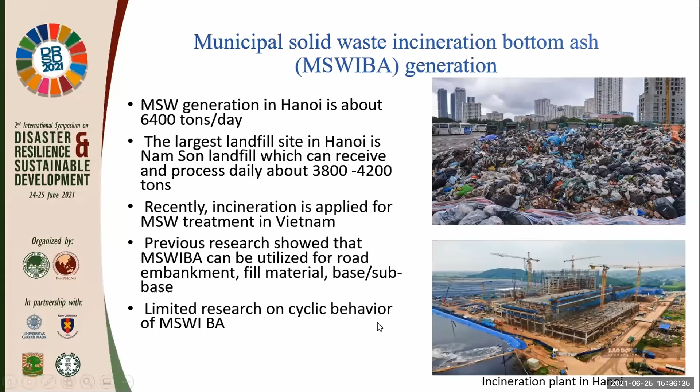Recently, incineration is applied for MSW treatment in Vietnam. Previous research shows that the MSWI bottom ash can be utilized for road embankment, base, and subbase. However, there is limited research on the cyclic behavior of MSWI bottom ash, so that's why we will focus on the cyclic behavior of the bottom ash in this research.

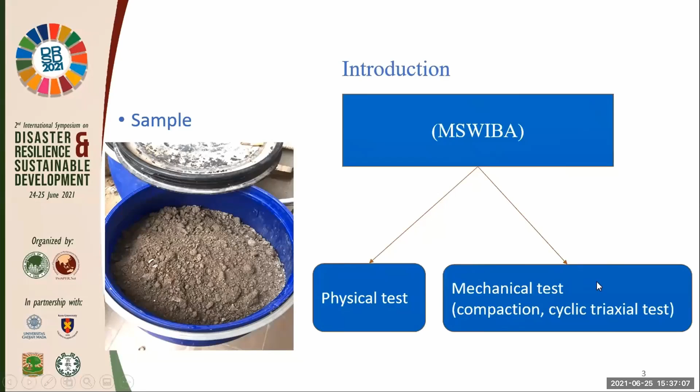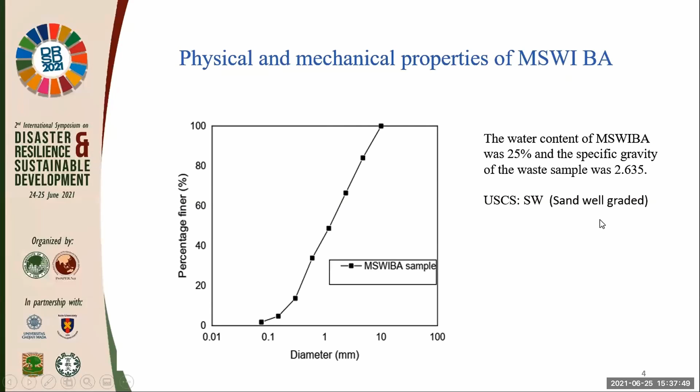This is the physical property of municipal solid waste incinerator bottom ash. You can see the particle distribution curve with percentage of finer versus diameter. We also have the water content of the bottom ash at about 25%, and specific gravity of the waste sample at about 2.64. According to USCS, we can classify it as well-graded sand.

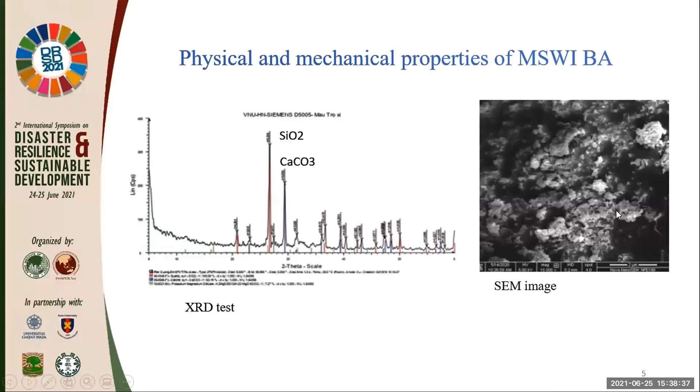Using XRD and SEM, we can estimate the micro properties of the municipal solid waste incinerator bottom ash. Here is the XRD test result: we have SiO2 and CaCO3 as the main components of the sample. The SEM image shows roughness on the surface of the sample, which means the sample has higher compression and higher potential strength, such as compression and the friction angle of the sample.

We conducted the resilient modulus test for the MSW bottom ash. First, we prepared the sample and compacted it into the triaxial mold with a diameter of 7 centimeters and a height of 14 centimeters. We compacted with the optimum water content and the basis for 90 and 95 percent of the maximum dry density.

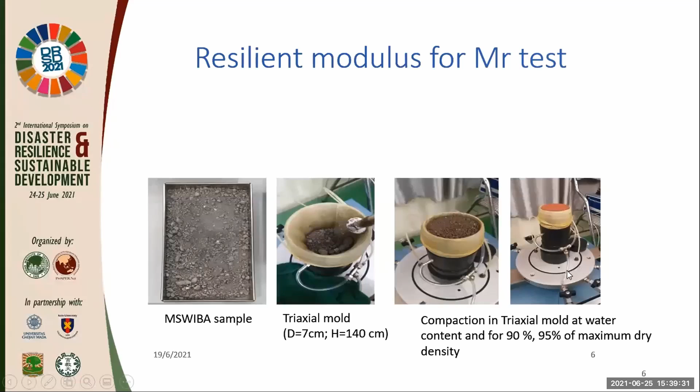According to the AASHTO T307-99 standard, the standard method of test for determining the MR of soil and aggregate materials, we conducted sequences from 1 to 15 with confining pressure sigma 3. We have the maximum deviator stress, and a given number of load cycles; for one cycle of 1 second, we have 0.1 second for increasing the load and 0.9 second for the recover duration. This controls the triaxial test sample setup.

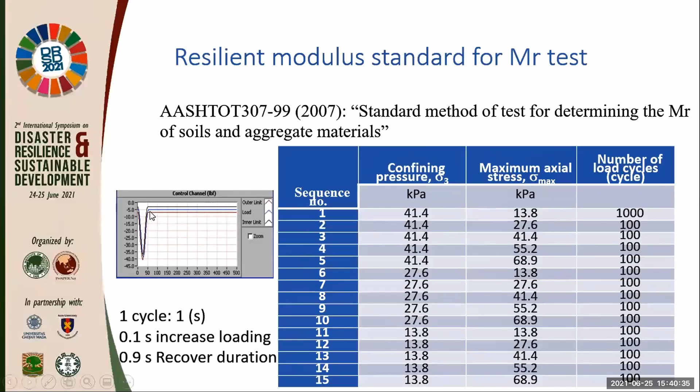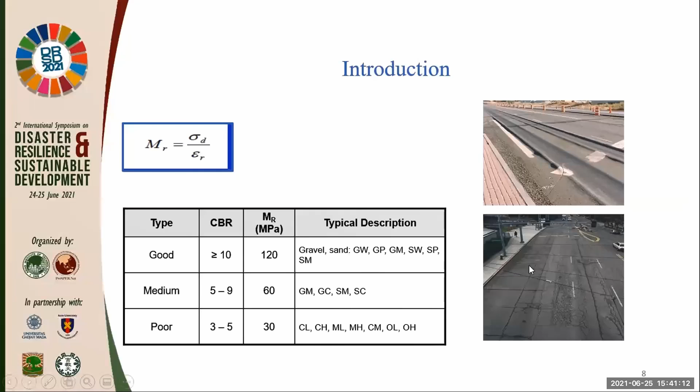Why do we need to conduct the resilient modulus test on the sample? Here we plan to use the bottom ash for road embankment, so we had to conduct the test to make sure the sample is good. For example, if we conduct the test and get the value of the MR, and if the MR is larger than 120, it means it's a good material for road construction.

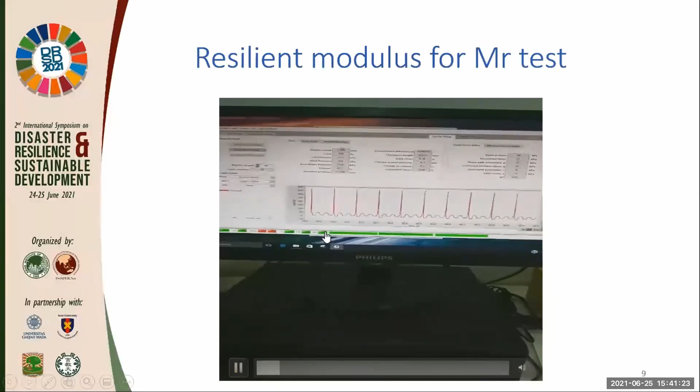Here I will show you how the machine works. It applies the cyclic loading as a triaxial test. We have the cell pressure and the deviator stress, and this shows the sample under testing.

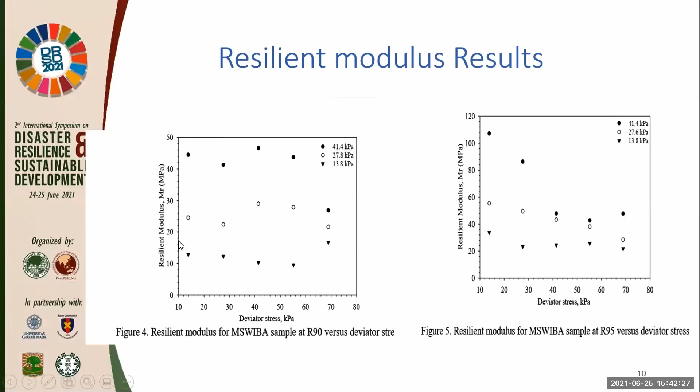For the results, we have the resilient modulus. Pictures 4 and 5 show the resilient modulus of the waste MSW bottom ash samples for 90 and 95 percent compaction. We have three different confining pressures: 41, 27, and 13 kPa. We can see the change of the resilient modulus according to the deviator stress, and also the change of the resilient modulus according to the axial strain.

We have two cases, 90 and 95 percent compaction degree. The picture shows the resilient modulus versus axial strain for samples at R90 and R95; especially at an axial strain of 0.1%, the resilient modulus of both samples is at its highest value for both R90 and R95.

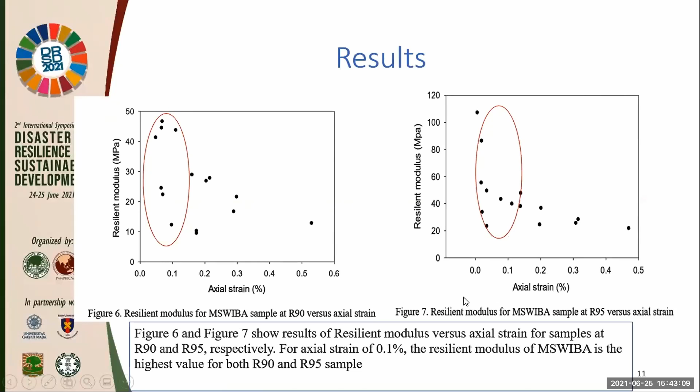Moving to the discussion: you can notice that the highest values occur for both samples at the beginning of the cyclic triaxial test. The behavior of the R90 sample is different from the R95 sample. For R95, the resilient modulus increases with increasing confining pressure and decreases with increasing deviator stress. The highest value of the MR is approximately 110 MPa for a cell pressure of 41 kPa, while the lowest value is about 20 MPa for a cell pressure of 13 kPa.

A similar behavior was found for coarse-grain size material used as sub-base material, as reported by Rahim in 2005.

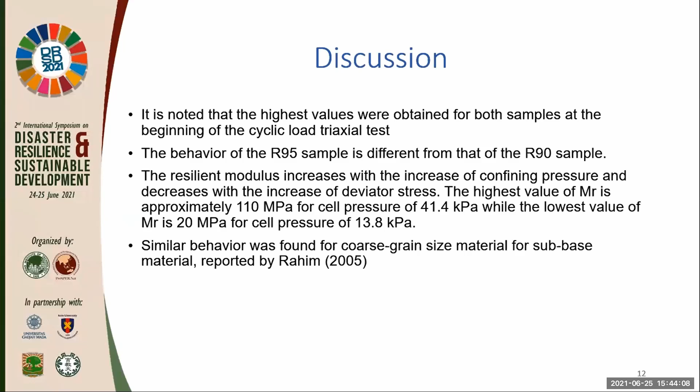For the conclusion, based on the experimental results, the following conclusions can be drawn. First, in the case of the R90 samples, the MR value decreased to some extent, then fluctuated and finally reduced when the deviator stress increased up to 70 kPa. In the case of the R95 sample, the resilient modulus increased with increasing confining pressure and decreased with increasing deviator stress.

It is recommended that MSWI bottom ash can be used as a construction material, such as for road bed and foundation layer.

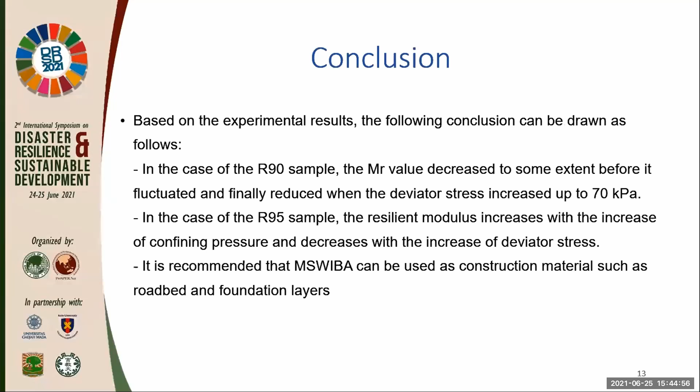And finally, thank you very much for your kind attention.

That's great, thank you very much. It's a great presentation. I think what you have highlighted is quite important, that you can actually use waste materials for practical use. I do have a question, but we can come back to that later. What cost benefit analysis have you conducted? I can believe it is cost effective, but what kind of benefits does it have over more traditional, more prevalent building materials for road construction? But let's leave it with that, that's a great presentation. Let's move on to the next one. Thank you.

Indrajit, do you want to add anything, or are you okay for us to go on? Let's go on. Okay, great. Thank you.

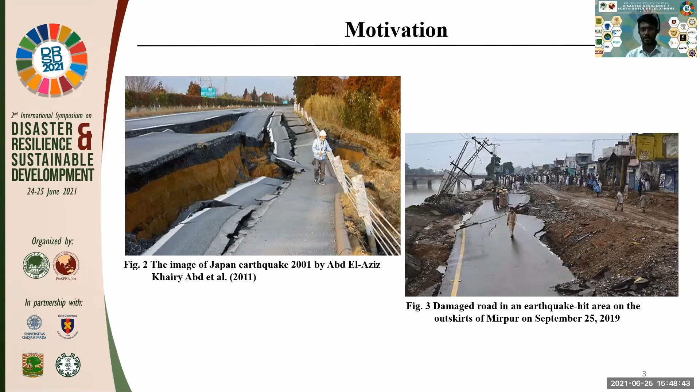So we have taken up this study to get some idea about the seismic behavior of pavements, how it will behave. Our research background includes: in the year 2011, Anbazhagan et al. made an attempt to propose a new RDS scale to classify and quantify road damage caused due to earthquake, based on data collected from major earthquakes in the past worldwide, except India.

As we know, the MMI scale is extensively used to measure earthquake intensity, which is based on damage caused to buildings, accounting site and induced site effects. But this MMI scale is not suitable to measure and quantify the damages caused to pavements due to earthquake. Hence, this RDS scale model is very significant in this aspect.

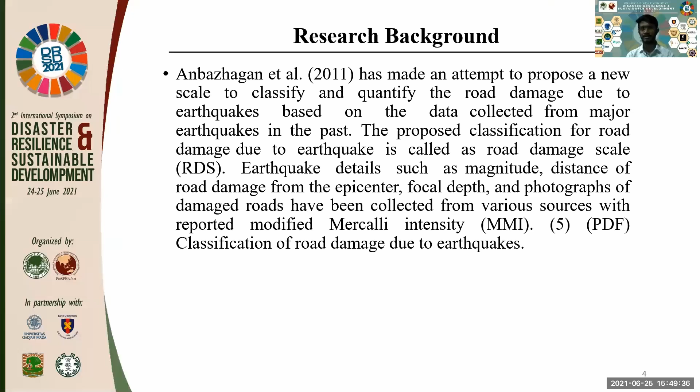In our study, we carried out FEM modeling, and the material property and geometry of the pavement and embankment were taken from Huang et al. 2004 and Tang 2001. A mesh convergence study was carried out to get the most stable results. The height of the embankment is 10 meters and the width is 6 times the height. The sides of the embankment are vertically fixed and the base is fully fixed, whereas 3 layers have been considered in the case of the pavement.

Three different layers have been considered with the application of load Q. In the base of the pavement, in the middle, we applied the harmonic sine loading to take into account seismicity.

Initially we considered only a 10 meter embankment to study how it behaves under the seismic harmonic load. But we found that using two different software, we are getting almost the same result, so the validation of the model is very good in this aspect.

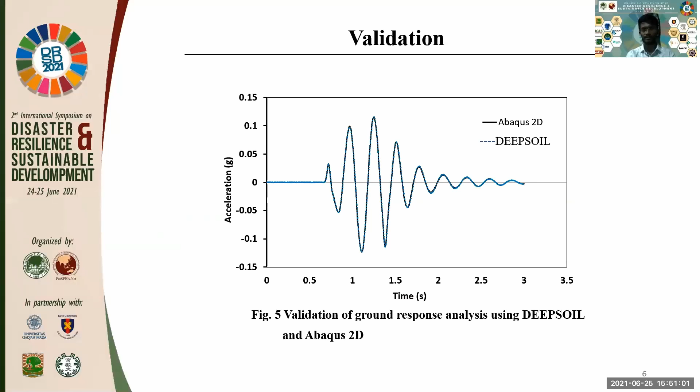In the next section, we also took into account the effect of the pavement layer, and 3 points have been considered for the study: point C, which is the crest, point D, which is a second point, and point I, which is the far field effect of the embankment under study.

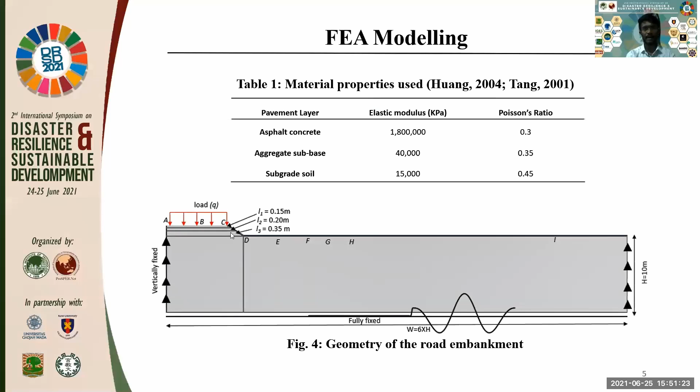As we go far from that crest to the far field point, the effect of acceleration in the acceleration time history shows a decrement, whereas the effect of loading is negligible here. For q equals 0 kPa and q equals 100 kPa, there is no effect on acceleration time history, and it gives almost the same result.

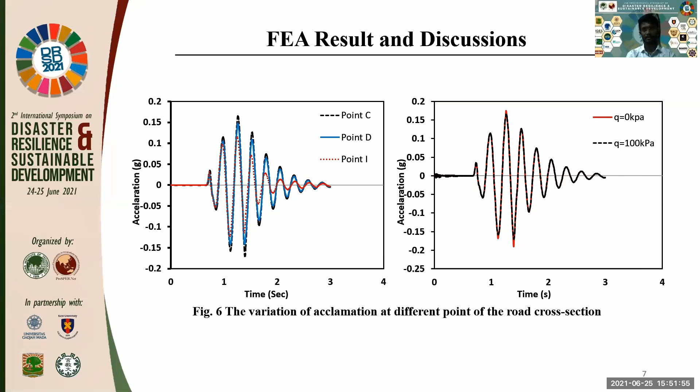In the next section, we considered loading and the pavements, with three different layers of the pavement. We observed that with respect to depth of the embankment, after 7 meters there is significant variation in the acceleration of the layers. We also observed that with increasing static load, from 0 to 300 kPa, there is an increase in acceleration, which is maximum for q equals 300 kPa and minimum for 0 kPa.

So from our study, these conclusions can be drawn: the comparison of acceleration versus time history using DEEPSOIL 1D and Abaqus 2D shows a reasonable result. The maximum seismic acceleration is found at the crest of the road embankment, and as the distance increases, the PGA of the ground motion decreases. The amplification increases due to the presence of pavements.

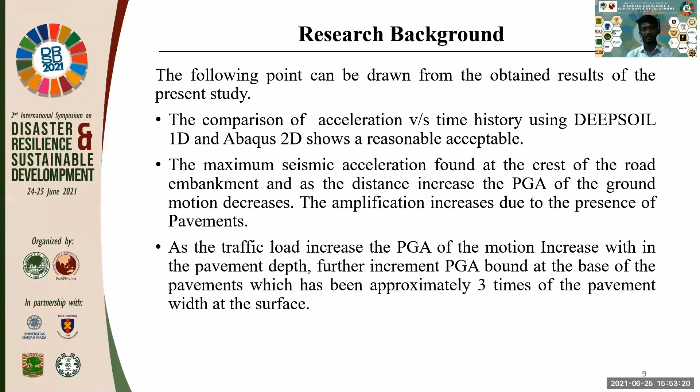As the traffic load increases, the PGA of the motion increases within the pavement depth. Further increment of PGA is bound at the base of the pavement, which has been approximately 3 times the pavement width at the surface.

These are the references that we have considered. Thank you.

Thank you, that is great. Look, we need to move on very fast because some of your presentations are longer than 8 minutes, and we have roughly a bit more than 20 minutes. So I think let's just carry on. Is that all right? Thank you.

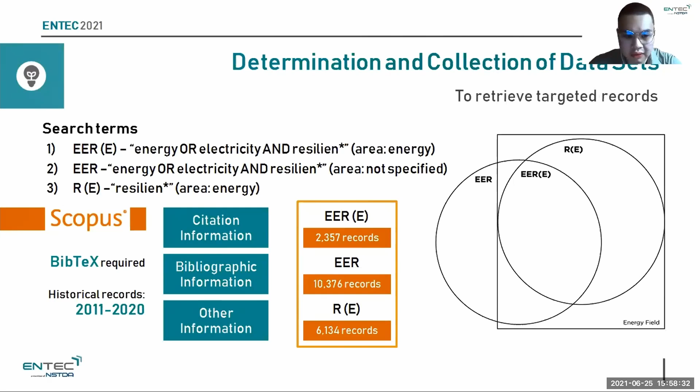The method that we use to analyze the data sets totals four analysis methods to capture the landscape. The first one is the word cloud.

It visualizes the occurrence frequencies of keywords using size. The second one is word growth.

It visualizes the changes over time of the occurrence frequency of the keyword. The third one is the MCA.

It visualizes associations among the keywords and groups them into clusters. The last one is the thematic map, which categorizes keywords into clusters and reflects them into themes based on density and centrality of the clusters.

For the word growth, there are several keywords showing sharp increases, for example microgrid, which has the same pace as resilience, climate change, and sustainability.

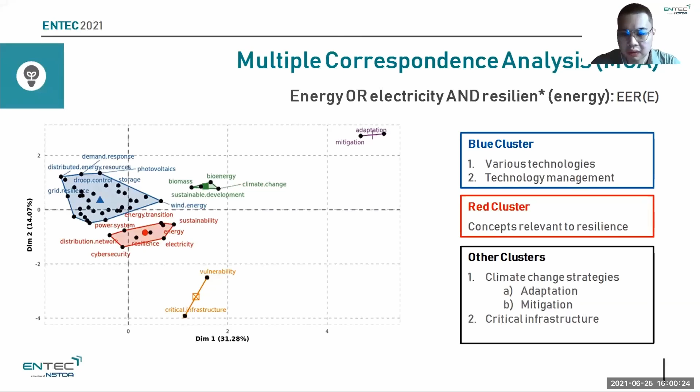For the thematic map, there are several themes existing here. The motor themes are the themes that scholars have been driving with these keywords inside, for example sustainability, microgrids, distributed energy resources, or energy storage.

The niche theme is the theme that scholars have developed but hasn't received a degree of importance, for example climate change and renewable energy.

From the results above, we also did other search terms and combined it in the landscape on your left hand side. We found that several keywords are identified. So for the landscape of energy resilient research, key topics within the landscape should be climate change, sustainability, distributed energy resources or microgrid, and smart grid.

This landscape can facilitate communication among stakeholders in various domains and ensure promotion of climate change and sustainability on energy resilience. And this is the end of my presentation.

COVID-19 transmission, or the means of passing on the disease from person to person, is caused by respiratory droplets in close contacts. Therefore, as a major preventive measure, physical distancing related restrictions and guidelines were imposed in all parts of the world in different scales.

Research studies have proven that the higher level of travel restrictions imposed in wider geographic extents can control the transmission of the virus in significant levels.

This ability of the disease to spread is measured using the R reproduction rate. Research has identified that the cities where the highest number of R rates were recorded are common to have high-density community agglomerations with high mobility patterns.

Usually, high mobility patterns are found at cities where road network connectivity is recorded in high values. Therefore, network connectivity can be considered as one of the factors influencing the transmission of COVID-19 or any other contagious disease.

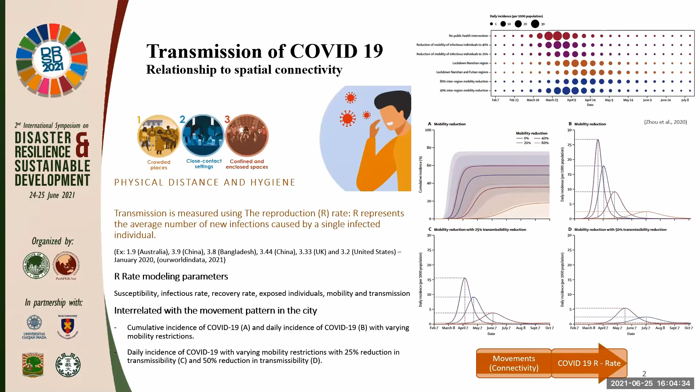As the world was battling against COVID-19, what we can identify is that all disaster events are followed by a sudden spike in COVID-19 cases during the post-disaster period. Therefore, as far as pandemic outbreaks are considered, rapid onset disasters can be considered a high conflicting and high-risk associated scenario, as there are no proper guidelines available.

As a novel response to the integrated hazard situation with COVID-19, the first ever official response released was the guidelines for tsunami warning services, evacuation and sheltering.

It clearly explains that a tsunami evacuation order should take priority over a COVID-19 stay-at-home order. During this period, fortunately, we have not experienced a tsunami amongst the pandemic. However, other disasters during the pandemic explain the probable situation. It is questionable as it generates complementary environments for the pandemic, meaning rapid and mass movements and confined community gatherings during evacuation which compromise physical distancing measures.

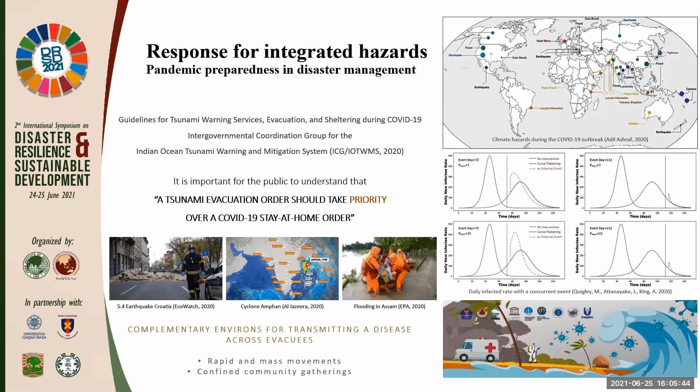Where does it happen and how? Most of the aforementioned disaster situations are followed by general evacuation proceedings, aimed at guiding all affected persons towards safe places irrespective of the pandemic condition. In tsunami evacuation, it mainly considers the deterministic tsunami wave height and the estimated lead time for the first devastating wave.

Therefore, a different strategy to incorporate a pandemic situation in this evacuation planning should be introduced. However, static evacuation routes with predefined options have deprived adaptive pandemic preparedness in the evacuation process. Therefore, the evacuation planning process should be improved using a connectivity-based approach, because connectivity can identify the risk of internal and external impacts from other hazards such as pandemic and identify the critical routes in the evacuation plan.

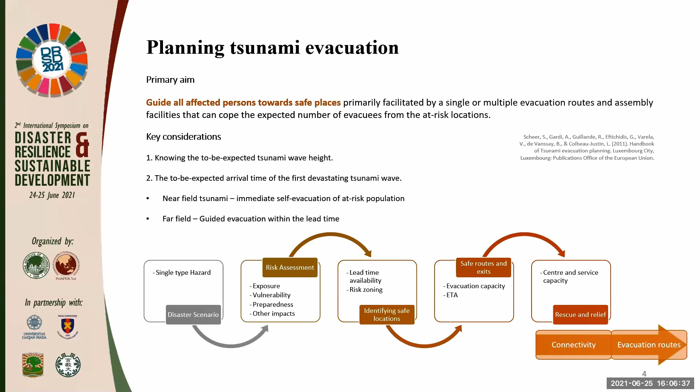What we can observe in the literature is that the guidelines on disaster response, particularly on evacuation, conflict with the guidelines on pandemic management. In particular, pandemic management measures consist of global strategic objectives including controlling community transmission through physical distancing measures. In contrast, the current evacuation guidelines are set to promote concentrated and confined evacuation, mainly considering the convenience for rapid response.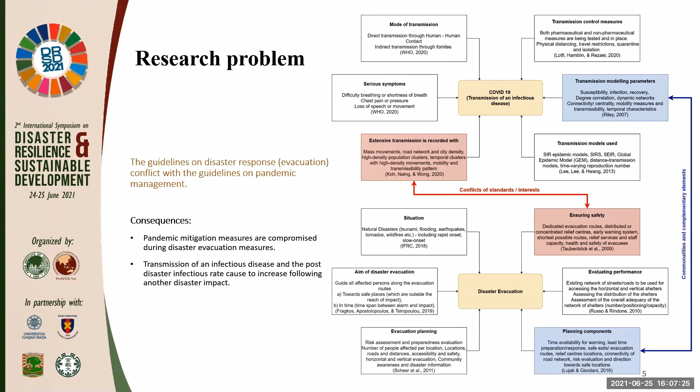This can increase the risk of disease transmission, and the efforts to contain COVID-19 or an infectious disease can be compromised. Therefore, identifying the relationship of COVID-19 or infectious disease transmission during evacuation is a significant need in the current identified guidelines.

Therefore, to address this research gap, the COVID-19 transmission pattern can be studied over a simulated evacuation model for a rapid onset disaster situation and identify the potential relationships.

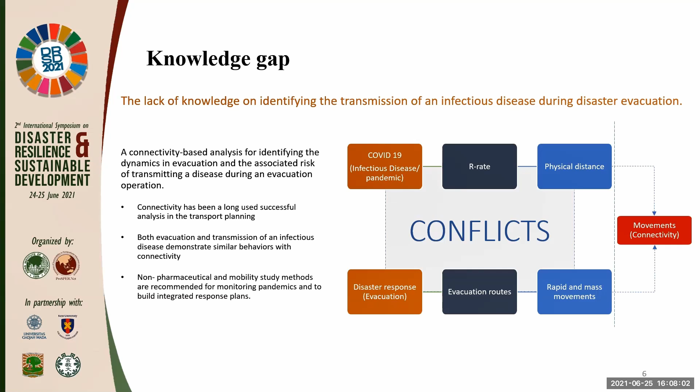For this, a connectivity-based approach can be considered as a potential way forward, because connectivity has been a long-used successful analysis in transportation planning. Both evacuation and transmission of an infectious disease demonstrate similar behaviors with connectivity, and non-pharmaceutical and mobility studies are recommended for monitoring pandemic and to build integrated response plans.

Accordingly, the research aims to identify the elements affecting the transmission of an infectious disease during evacuation for developing the framework for planning safe tsunami evacuation clusters. The framework focuses on improving the preparedness of coastal cities with a comprehensive tsunami evacuation mechanism for pandemic situations.

An integrative literature review approach was used for developing a new framework and perspectives on the topic. The key findings of the literature review were studied in a content analysis using the open source based Gephi software to identify the key components for the conceptual framework.

The results were incorporated into the conceptual framework to facilitate the pandemic risk assessment during an evacuation operation following three phases: focusing risk identification, risk assessment, and risk management.

Research has shown that the weighted connectivity analysis can identify the strongly and weakly connected parts of the network and can be used in the road network risk assessment. Node centrality, as an analytical method of connectivity, can represent the risk of a given node based on the geometric positioning of the network. The node properties can be weighted in combination with the tsunami risk parameters such as exposure, vulnerability, and disaster preparedness.

By integrating the simulation of evacuation with COVID-19 R data, the hotspots of pandemic outbreak during evacuation can be predicted. Accordingly, the nodes can be ranked based on the value of risk to develop a clustered evacuation strategy for the areas identified with high pandemic risk during an evacuation process.

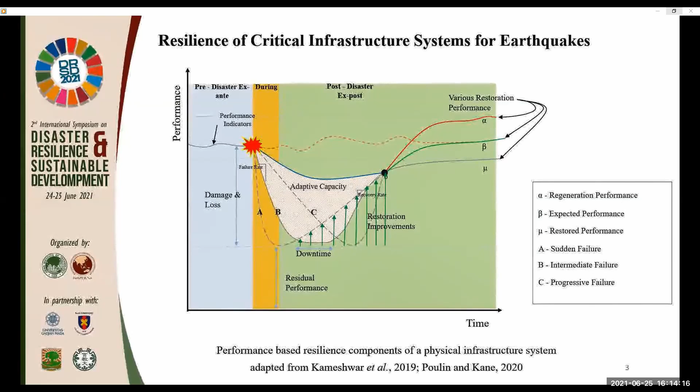So the methodology was carried out using the Scopus database as well as the PRISMA flowchart. As a first step, Scopus database was used to retrieve appropriate journals and articles with the limitation of engineering and English language based articles.

Consequently, 228 journals were selected by reviewing the abstract as well as the title of each study and the scope of this study. Subsequently, 43 multi-hazard based frameworks were chosen as a final step, and 24 earthquake based frameworks were used in order to progress the further study.

Critical infrastructure resilience framework in this study especially focuses on 2015 to 2021 recently published articles. It's obvious that 2020 has more numbers of articles studying the novelty and new type of proposed frameworks. Also, critical infrastructure such as transportation, water, electricity, power, and telecommunication was included in the study.

At the same time, houses and buildings were studied in order to check the structural integrity of critical infrastructure, such as hospitals and schools that come under critical infrastructure service providers.

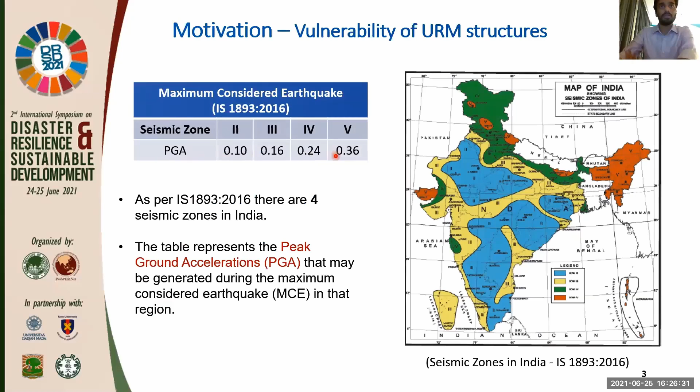Moving towards the motivation, as you are all aware, there are 4 seismic zones in India, which are determined based on the PGA values of the maximum considered earthquake that can occur. High seismic hazard, when coupled with high exposure of unreinforced masonry structures, gives rise to a high level of vulnerability.

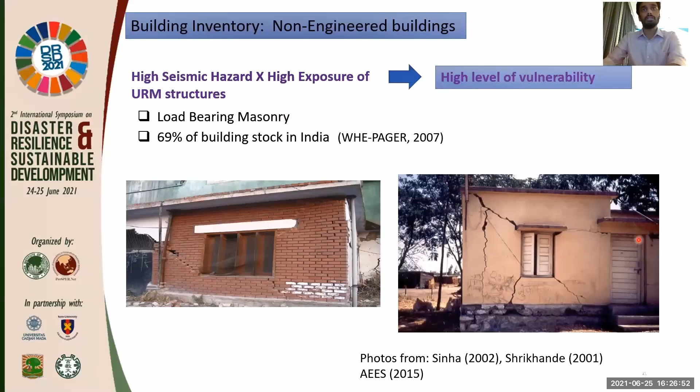Most of the building stock, that is around 70% in India, is load-bearing masonry, and these types of structures are highly vulnerable to damage. The images show some of the damages that have occurred to masonry structures because of earthquakes.

So the objective of the study is to assess the vulnerability of non-engineered unreinforced masonry piers made with soft brick, using the 2001 Gujarat earthquake for scenario-specific assessment.

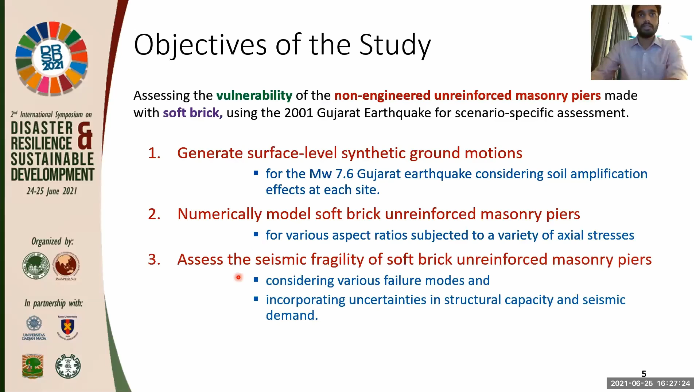For this, we first generate surface level synthetic ground motions for the magnitude 7.6 Gujarat earthquake, and then we numerically model the soft brick unreinforced masonry piers for different aspect ratios and axial stress values. Then we assess the seismic fragility of these unreinforced masonry piers.

Looking towards synthetic ground motion generation, we require synthetic ground motions because we usually lack recorded data, especially in near field regions. For example, for the magnitude 7.6 Gujarat earthquake, there are only 13 PGA values available. Hence, we use synthetic ground motions.

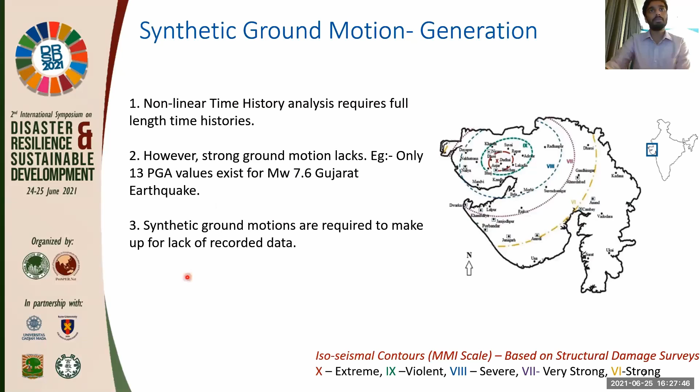In this study, we use the modified stochastic finite fault method to generate synthetic records. This method has 3 key steps: first, the earthquake fault plane is divided into smaller subfaults; each subfault is treated as a single source radiating seismic energy; and finally the entire time history is computed as the summation of the response of these individual subfaults.

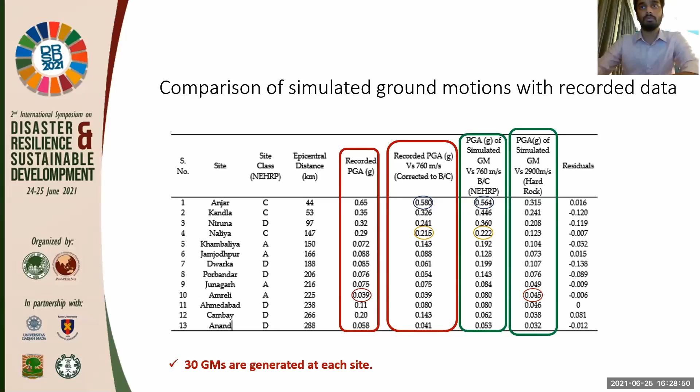Now, moving towards numerical modeling of soft brick unreinforced masonry piers. Soft brick unreinforced masonry.

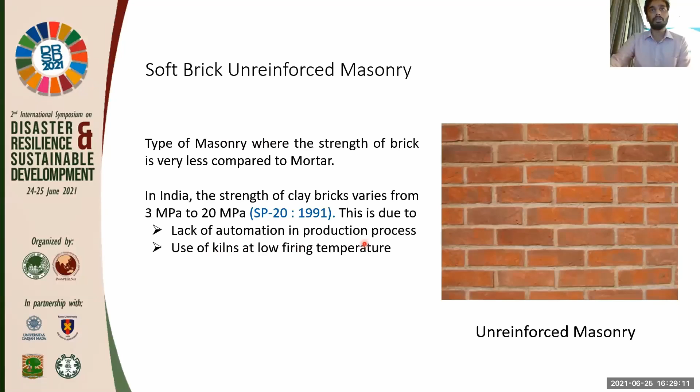This is a type of masonry where the strength or stiffness characteristics of brick is very less compared to that of mortar. For example, in India, the strength of clay bricks varies from 3 to 20 MPa. This is due to lack of automation in the production process and use of kilns at lower firing temperature.

So for modeling the masonry, we use the micro modeling approach in which the brick elements are modeled as continuous elements, and the interaction between brick and mortar elements are represented by interface elements, and these elements facilitate the stress transfer between the brick units.

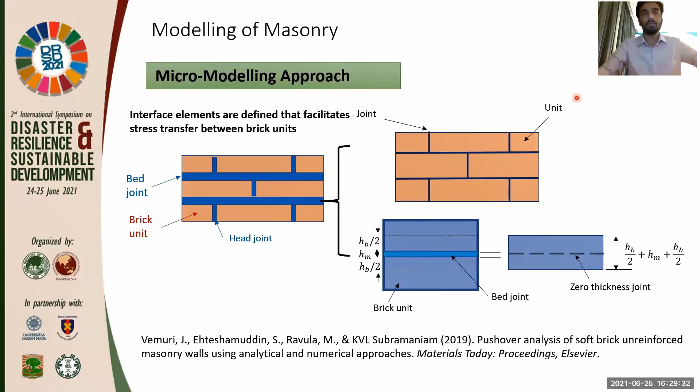Now we perform a parametric study to observe and quantify the effect of axial stresses and aspect ratio on the failure modes of unreinforced masonry piers. We vary the axial stress using 3 values, 0.1, 0.5, and 0.75, and aspect ratios four different values. We observe 3 different failure modes: sliding, flexure, and shear.

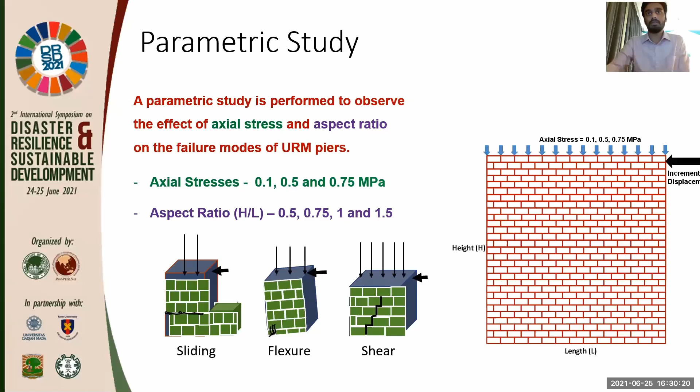To identify the limit states in each of these failures, we plot the monotonic pushover curves for these failure modes. In sliding failure, we see that first there is some onset of flexure cracking, followed by sliding, and then at 4 mm there is loss of bond resulting in collapse.

For shear wall, we again see some onset of flexural cracking very early, then onset of diagonal cracking, followed by failure, for which the diagonal cracking extends over a larger part of the wall. Then for flexure wall, we notice the failure in form of toe crushing or rocking of the wall.

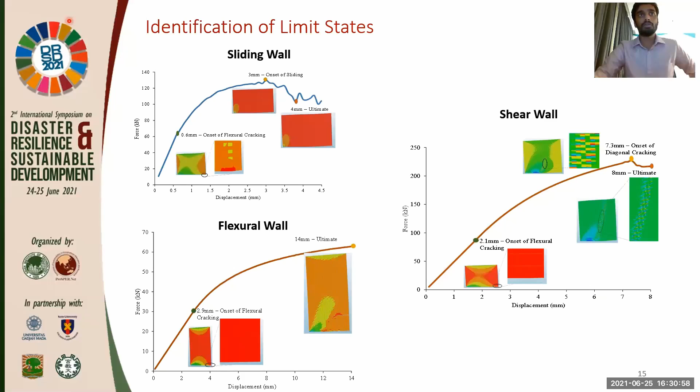Here is a failure matrix that we were able to build using different values of axial stress and aspect ratios. So first sliding failure, followed by shear, and then flexure dominating for higher aspect ratios.

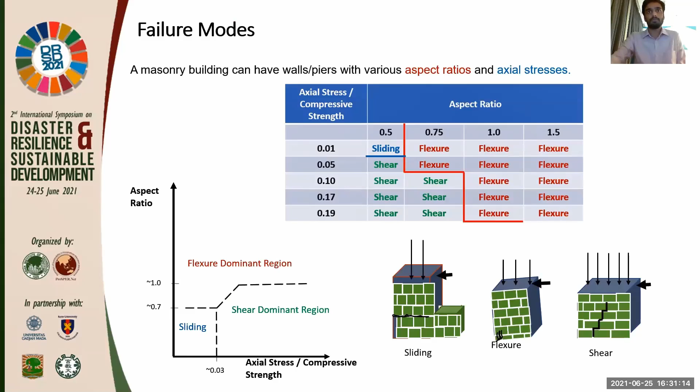Then looking at the seismic fragility assessment. Here is a framework developed by us for carrying out the fragility analysis. First, we simulate the response of 10 soft brick unreinforced masonry pier samples, and we also generate 10 earthquake ground motions for each PGA level, which gives us 100 nonlinear time history analyses, and using this we can develop the collapse fragility and calculate the performance of the structure.

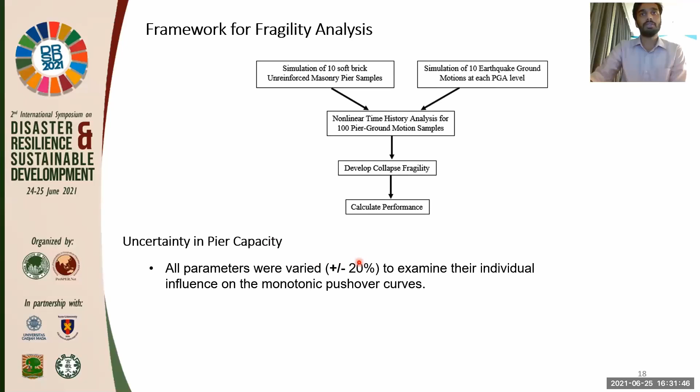And we quantify the uncertainty in pier capacity by varying all the input parameters by 20% to examine their individual influence on the monotonic pushover curves. We observed that there are three parameters which affected the response of shear walls the most, five parameters for sliding, and only one parameter for flexure pier.

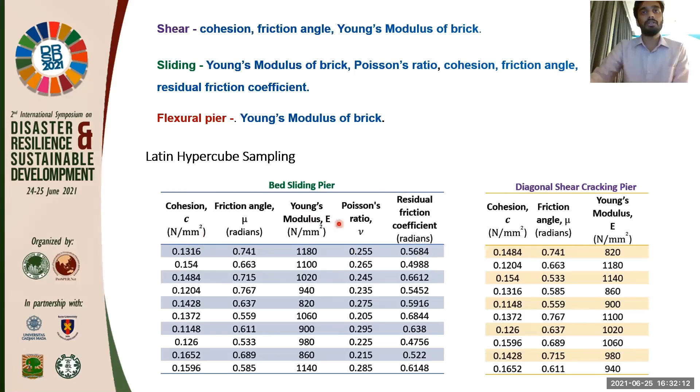Now we use the Latin hypercube sampling, which generates random realizations of these input parameters. For example, for bed sliding pier, we have 10 realizations of 5 different input measures. Similarly, we have it for diagonal shear cracking as well. Values from the Latin hypercube sample give us different monotonic curves for different failure modes.

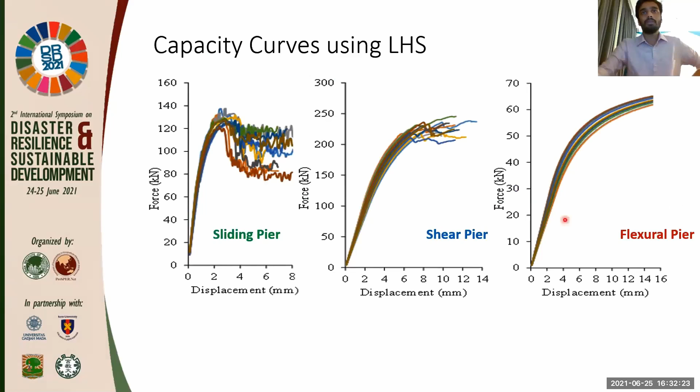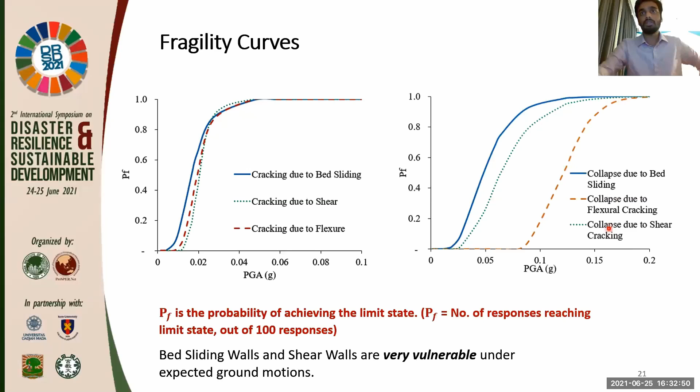Now we were also able to quantify the ground motion and capacity uncertainty. We observed that the ground motion uncertainty, represented in terms of the coefficient of variation of the pier displacement, is far more significant than the capacity uncertainty found in flexural walls as well as shear walls.

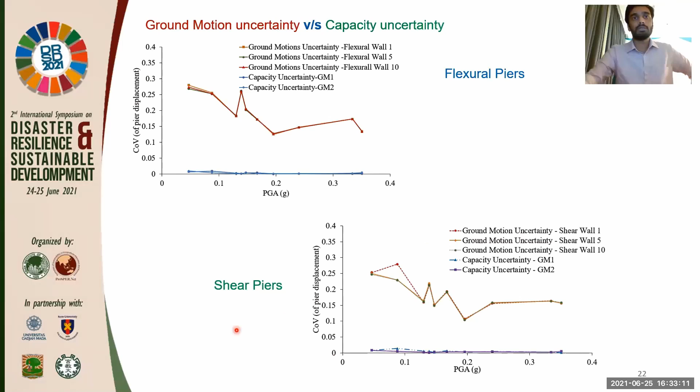As a summary, ground motions are generated at surface level for various towns of Gujarat. Then we employ micromodeling technique to model the response of soft brick walls, and we observed that aspect ratio and axial stress significantly affect the type of failure, and we developed a failure matrix as well. Then we developed a framework for seismic fragility analysis, and used the Latin hypercube sampling technique to account for uncertainty in pier capacity.

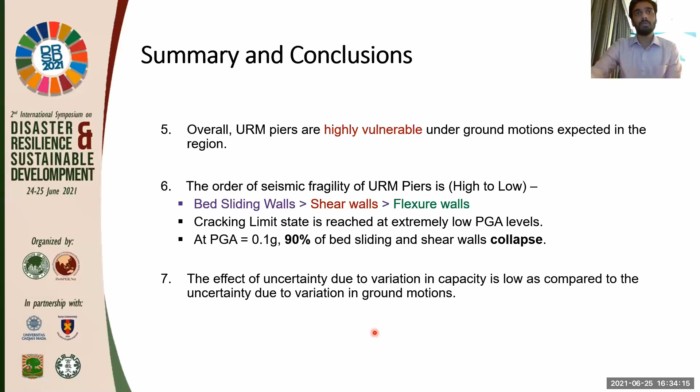We observed that unreinforced masonry piers are highly vulnerable under ground motions expected in the region, and the order of fragility of these piers is that sliding walls fail first, followed by shear, then flexure walls, and the cracking limit state is reached for very low PGA values. At PGA of 0.1g, 90% of bed sliding and shear walls collapse. The effect of uncertainty due to variation in capacity is very low compared to the uncertainty due to variation in ground motions, which was calculated from the coefficient of variation of the pier displacement.

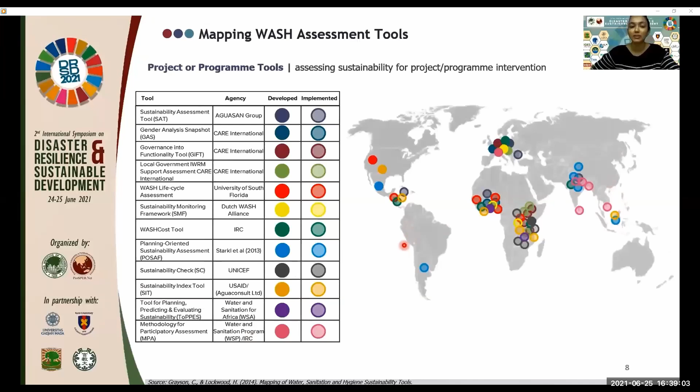As seen, the development of these tools majorly takes place in Europe or North America, but they are majorly being applied in African, Asian, or Latin American countries. So most of the tools are developed in the global north and applied in the global south. However, an ideal scenario would be a tool being developed taking into consideration the contextual scenario of where it is to be applied, and the study is exactly trying to do that. Since the IRC building block framework hasn't been applied anywhere yet, and the study is in collaboration with IRC, it is taken as a reference point to further carry out the study.

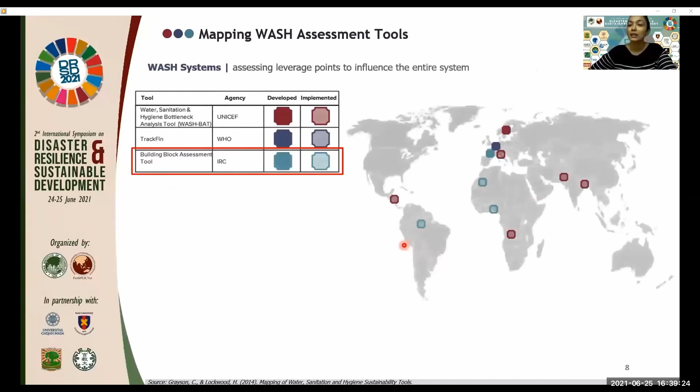Now coming to objective 3, which forms the main crux of the study, we are trying to answer three questions. The first is, what is the approach for institutional assessment? The approach is essentially deciding upon a set of performance indicators which will allow us to map the strengths and weaknesses and then identify areas of intervention.

This is being done for a city area of 566 square kilometers, with water supply household coverage of 98%, sanitation coverage of 86%, and city coverage for drainage of 30%.

Now coming to the second question, which is, what is the framework being used to perform the institutional assessment? The macro level assessment part of the framework includes using the IRC framework to analyze and operationalize it for our purpose, which basically included mapping all the institutional agencies in WASH contributing for the city of Ahmedabad.

Step 2 includes, for macro level assessment, deciding performance indicators and categories by referring to literature on institutional assessment and looking at what are the good practices in institutional functioning.

Step 3 is formulating a questionnaire and deciding upon a set of stakeholders in order to tap into the decided set of indicators.

Step 4 is rating and assessing the institutional performance by deciding upon the rating method for each of the indicators and then also corroborating it from secondary sources. The result is then in the form of a performance matrix, which will allow us to identify areas of intervention.

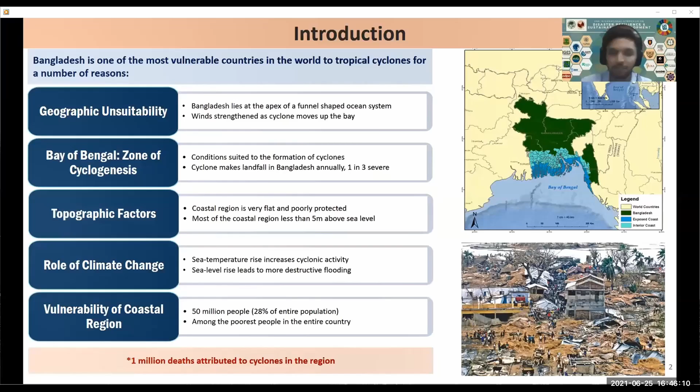Here we see the destruction caused by the 1991 Gorky cyclone, which left 300,000 people dead. In total, over 1 million deaths have been caused by cyclones in the region. Now, to save lives, the government and various NGOs have taken the initiative to build cyclone shelters, which are multi-storied reinforced concrete buildings and structures, such as those seen in the images below.

Looking at the graph, we can see that in the aftermath of the 1991 cyclone, there has been a remarkable effort to construct cyclone shelters, and at present there are over 6,000 shelters in the country. On the right is the historical overview of cyclones in Bangladesh. The top graph shows cyclone-related deaths on a logarithmic scale, and we can clearly see the number of cyclone deaths in recent years is significantly lower than in previous years.

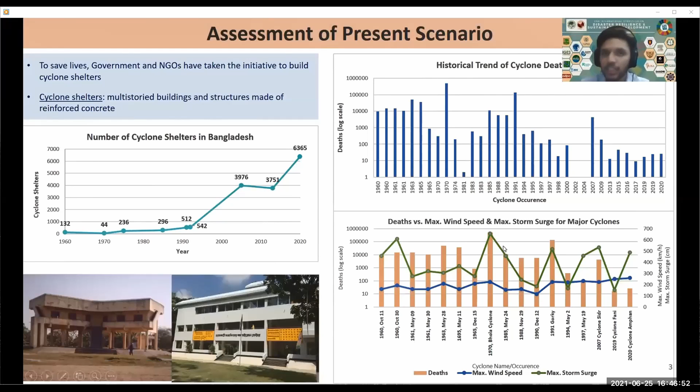This is despite the fact that recent cyclones have had wind speeds and storm surges as great, if not greater, than those in the past, which were much more deadly. So clearly, the cyclone shelters are having a positive impact. Yet despite this commendable progress, cyclone shelters still accommodate only 5% of the coastal population, so new cyclone shelters need to be built.

However, previously there has been no scientific basis for selecting where cyclone shelters should be located; it was done mostly on the judgment of experts or the demands of locals, and no study has really tried to address this issue. So to maximize effectiveness and resource utilization, there needs to be a scientific study to reevaluate the placement of cyclone shelters, and this study aims to achieve exactly that.

This study has three main objectives: firstly, to conduct a cyclone risk assessment of the coastal region through a risk matrix; using this, we can identify which locations most urgently require capacity; and lastly, we can propose a plan for the placement of future cyclone shelters along the region.

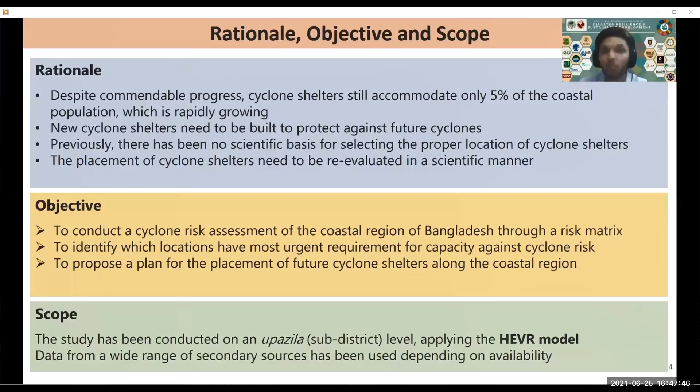This study has been conducted at the Upazila level, roughly equivalent to the sub-district level, where we apply what is known as the HEVR model, using data from a wide range of secondary sources. The methodology we applied is a modified approach based on the HEVR model first put forward by the UN IPCC in their SREX report in 2012.

So what we need to do is mitigate this remaining risk. We need to further build capacity that will allow the community to fully withstand the disaster, so that capacity and risk can fully offset one another. This is the basic principle that serves as the basis of our entire study.

So what we did was, for each element of risk, H, E, and V, as well as for C, there are a number of components that serve as parameters. We have assigned weightages to each of these components, we have normalized the attribute data, and we have categorized them from 1 to 5 so that we can develop a risk matrix.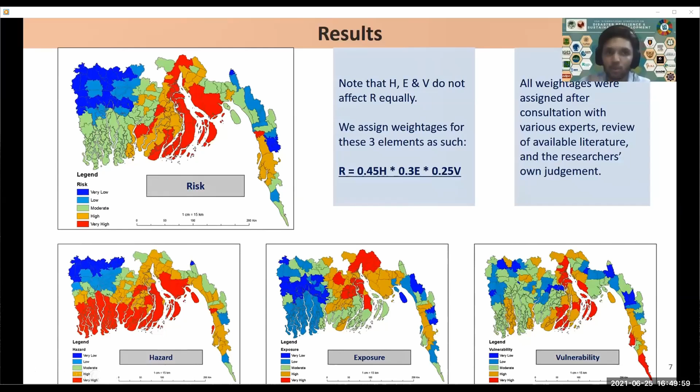Here is the risk map, which was derived from the hazard, exposure, and vulnerability maps, each of which were derived from their respective components. For each, you will see there are a number of qualitative descriptors, and each of these corresponds to a numerical value from 1 to 5. So very low equals 1, low equals 2, moderate 3, high 4, and very high 5.

Likewise, we have derived a capacity map, and we have done an analysis for each Upazila based on risk and capacity. Here we introduce a new term called need, and this term is synonymous with the previous term called risk to be mitigated.

The main idea is that for locations which have very high risk, they should have very high capacity, and likewise, locations which have very low risk can do with very low capacity. However, when capacity is lower than risk, that is when there is a need to increase the capacity.

Because both risk and capacity are done on a scale of 1 to 5, if we take the ordinal values of the risk level and subtract the ordinal values of the capacity level, we will get the values for the need level. And this map here represents this exact thing, the need for capacity.

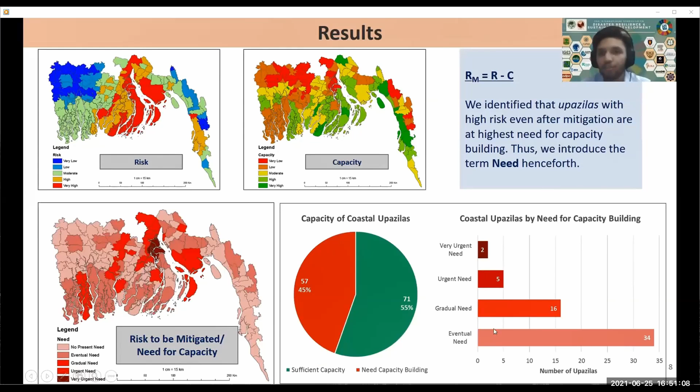The need varies, ranging from very urgent, which is a level of 4, meaning basically very high risk and very low capacity, all the way up to no present need required, meaning the risk is equal to or less than the capacity. We can see that a significant number of coastal upazilas, 57 of the 128, need capacity. Here is the breakdown of the coastal upazilas by how much they need capacity.

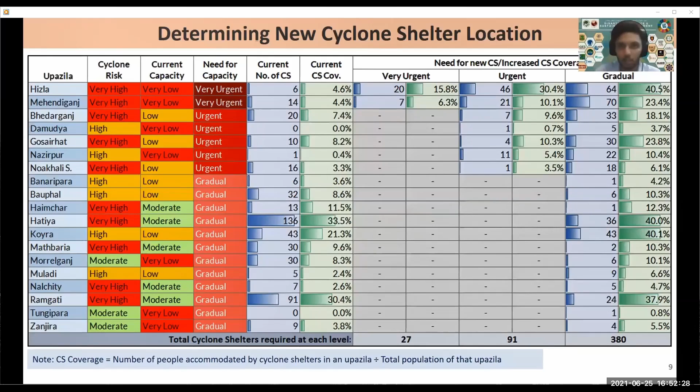So in conclusion, Bangladesh is very vulnerable to cyclones, and cyclone shelters play a big role. However, there are limitations in terms of the capacity as well as the distribution of cyclone shelters. This study adopts a scientific method based on an established model with some innovations, and an algorithm was prepared to determine which location needs cyclone shelters the most. We hope that this study establishes a framework that will help the government choose appropriate locations in the future for cyclone shelters. And lastly, an extensive field visit to understand the present conditions of the cyclone shelters, including structural features, facilities, and need for improvement, will be done as soon as circumstances permit.

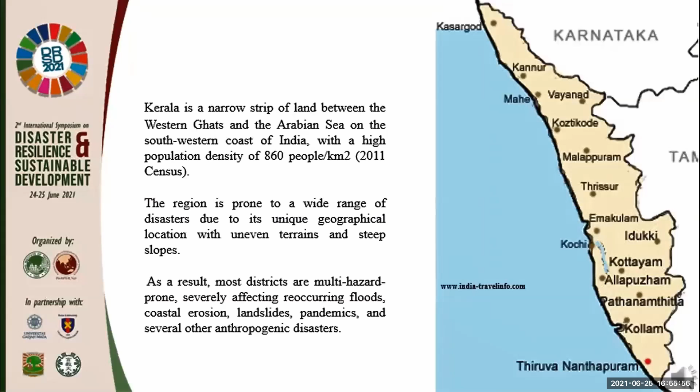School safety focuses on creation of safe environments for children, starting from their homes to their schools and back. This research critically examines the preparedness of schools in Kerala in handling disaster and works out strategies to combat any instances of a disaster. Kerala schools are marked for their excellent academic performances but have poor awareness of safety and preparedness. The unsafe school transportation is one such example proving the same.

The study suggests managerial, strategic, and implementation level policies for building safer, better school environments in Kerala by analyzing the current strategies exercised.

After understanding the context and the need for review on the subject, the study analyzes the existing school safety guidelines at national, district, and school levels. Furthermore, the study analyzes the state disaster management plans with the national school safety policy to elicit inferences leading to the conclusion.

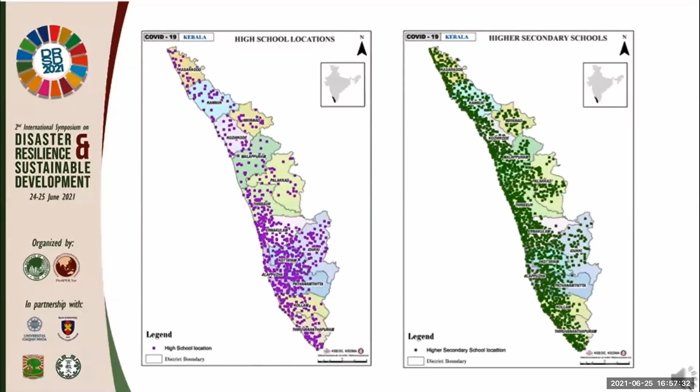In the state, there are about 12,644 schools in total, in which 4,504 are government schools, 7,277 are aided schools, and 863 are unaided schools.

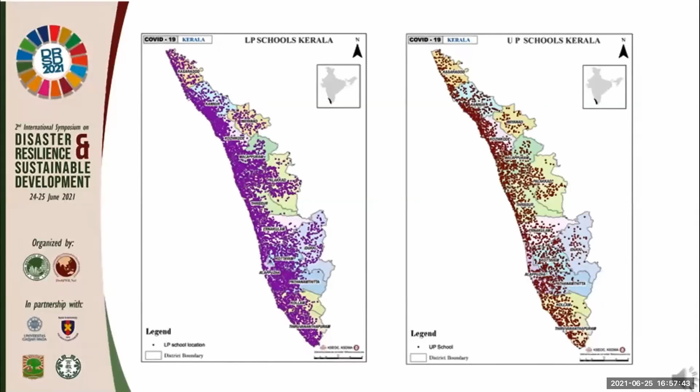Malappuram has 1,379 schools, which is the highest in the state, followed by Kozhikode.

Apart from the natural disasters, the most prominent hazards in Kerala schools are accidents caused by fire, electrical services, transportation, sports, excursions, unsafe food, exhibitions, festivals, and other man-made issues such as slips, trips, fall from heights, falling objects, and construction.

The National School Safety Policy identifies 5 action areas: strengthening institutional commitment, planning for safety, implementation of safety actions, capacity building for safe schools, and regular monitoring of risk and revision of plan.

Each district designates a block level officer to manage block level activities and efforts in school safety. The district education officer holds the responsibility to check if the recognition certificate is issued to schools that comply with the safety norms.